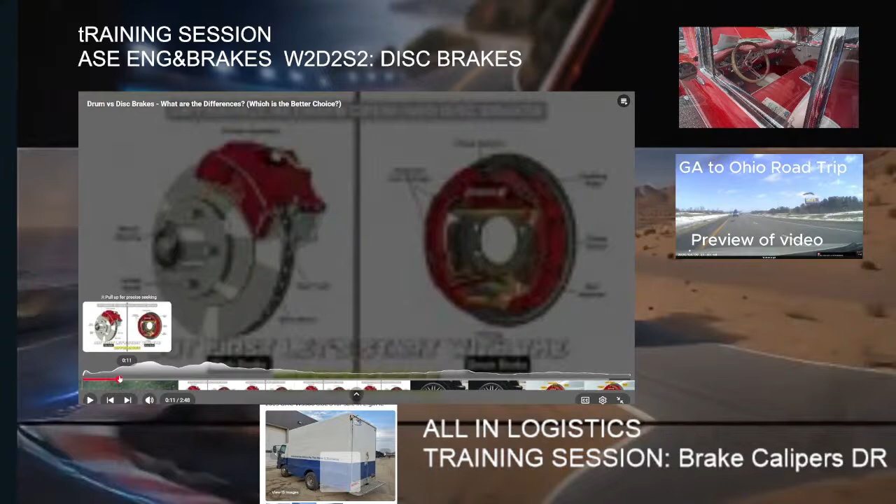Between drum and disc, in general, it's two different types of brake designs that you're going to run across. You're either going to run across disc brakes or drum brakes. The drum is like two shoes that are connected with each other, and they have a few different components like a few springs, some self-adjusters, and a few different mechanisms.

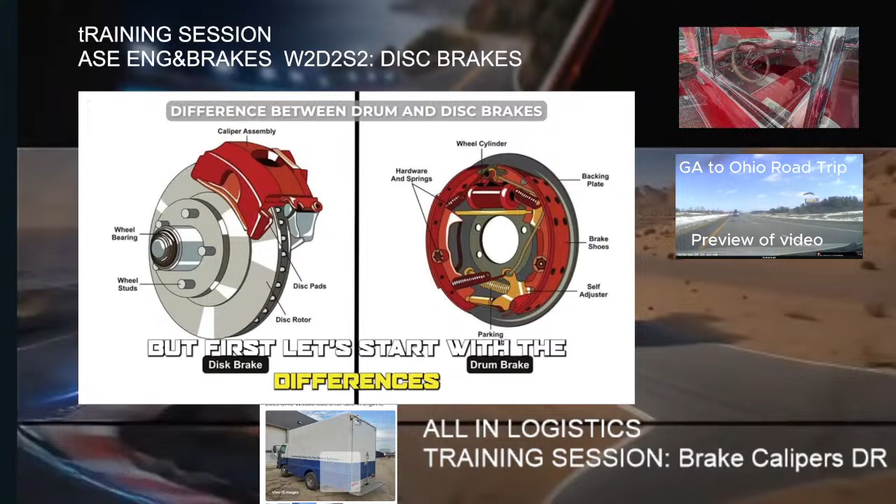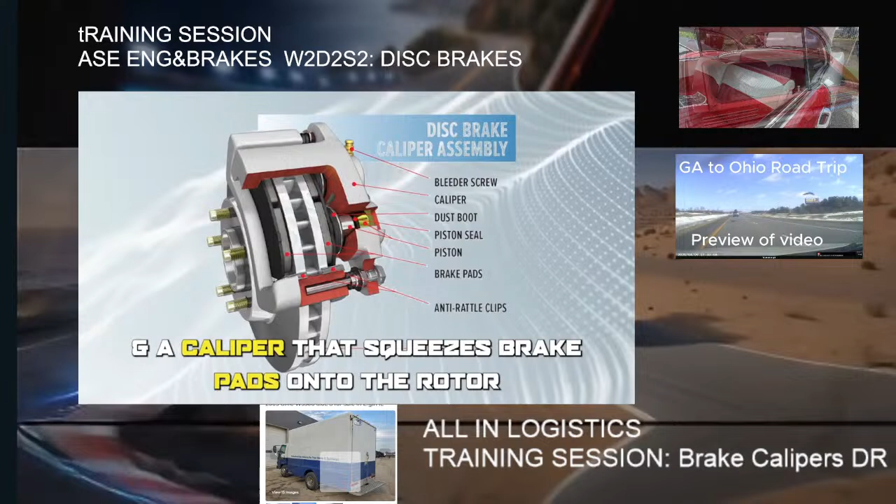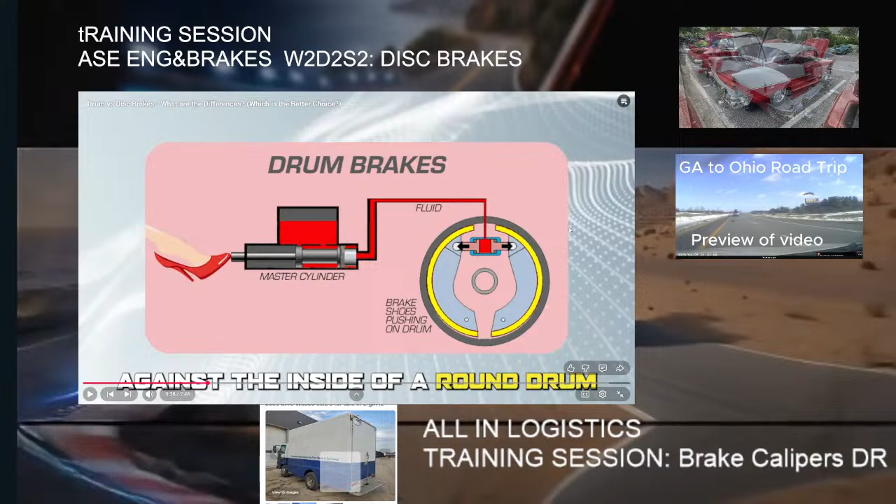A round drum attached to the wheel to slow it down. Disc brakes' effectiveness on a wet surface is smoother, cleaner than a drum brake, making it perform better.

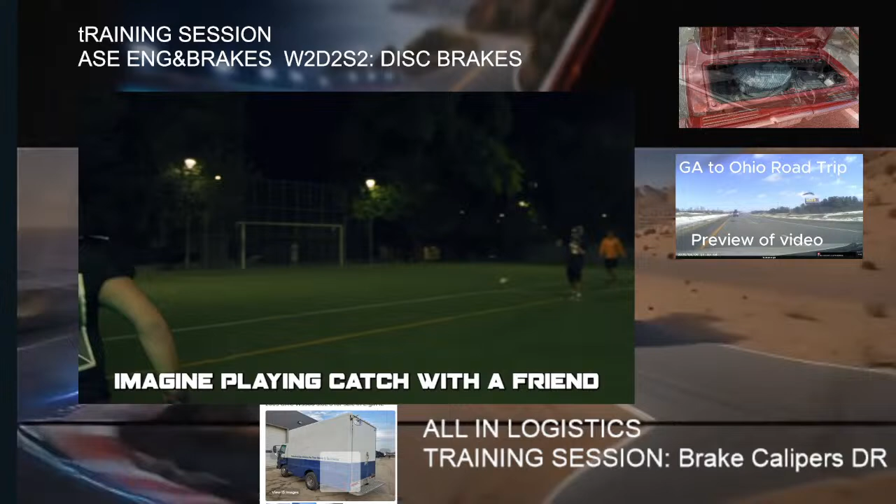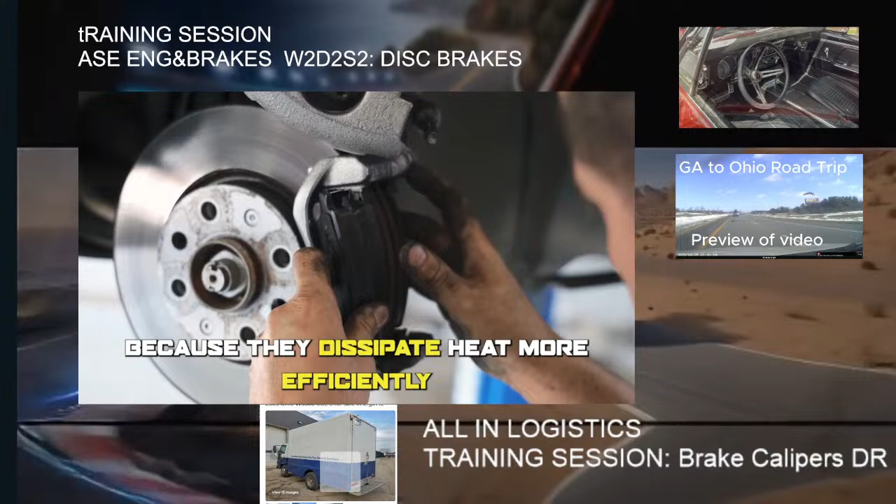Drum rotor - imagine playing catch. How brakes work is they're meant to slow down or stop a vehicle by applying friction to the brake pads or shoes to create friction. Disc brakes are often considered better because they dissipate heat more efficiently, provide better stopping power, are more precise, and are easier to maintain.

Disc brakes dissipate heat left and right, and it's the same for the full disc brake system.

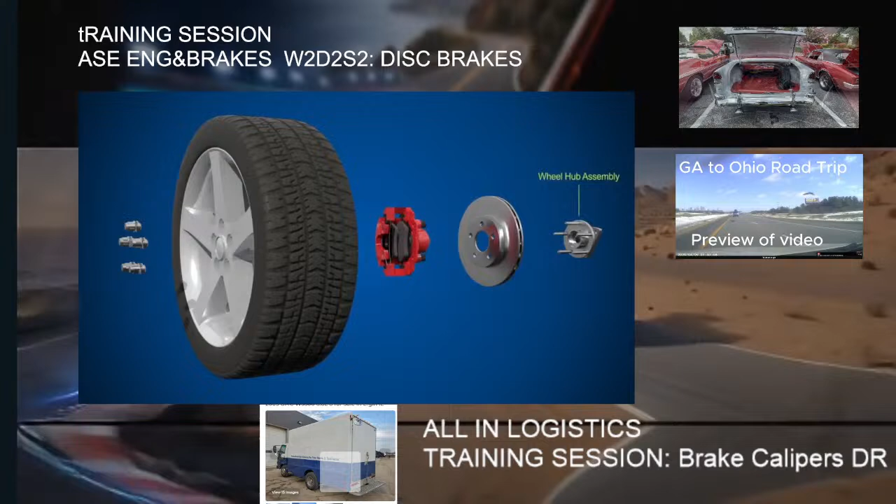We have the wheel hub assembly, the brake assembly, and the brake disc.

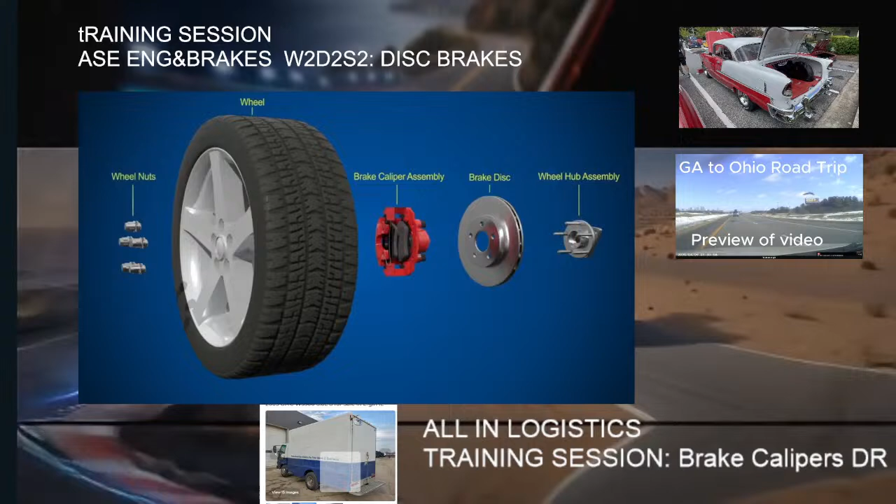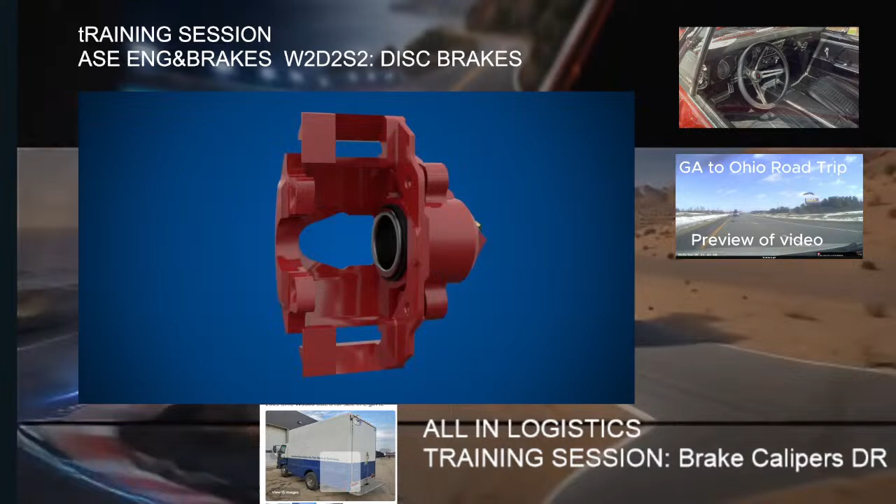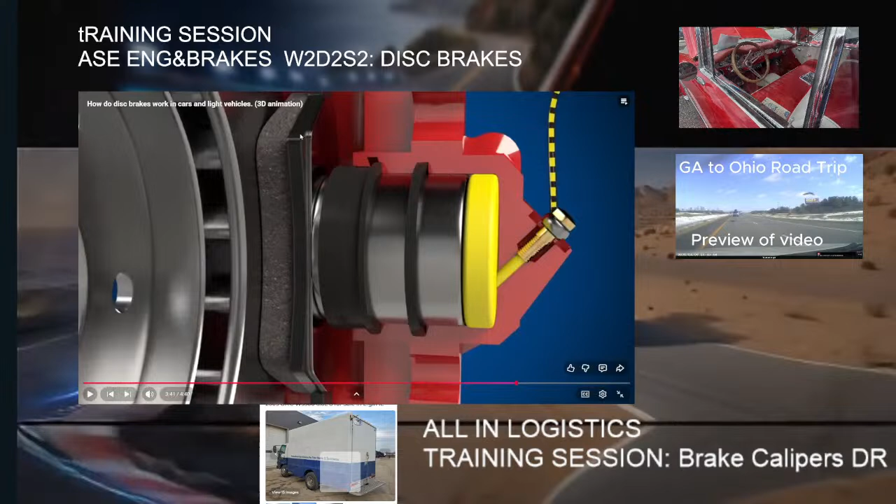An underlayer sandwiched between the backplate and friction material bonds the two together and acts as a thermal barrier to stop heat being transferred from the pad to the caliper. It happens with the base layer and then also the friction material. So it's 4 things, and generally speaking, if you understand how thick the shim, the backplate, and the underlayer is, you can figure out the brake's original position.

With pressurized hydraulic, the inner brake pad clamps onto a rotating rotor. The rotor is shaped like this, connected to the wheel hub. Brake pads are the component that rubs the rotor - they are connected to the chassis of the vehicle. So when they clamp the rotor, brake pads are able to slow the rotor's rotation.

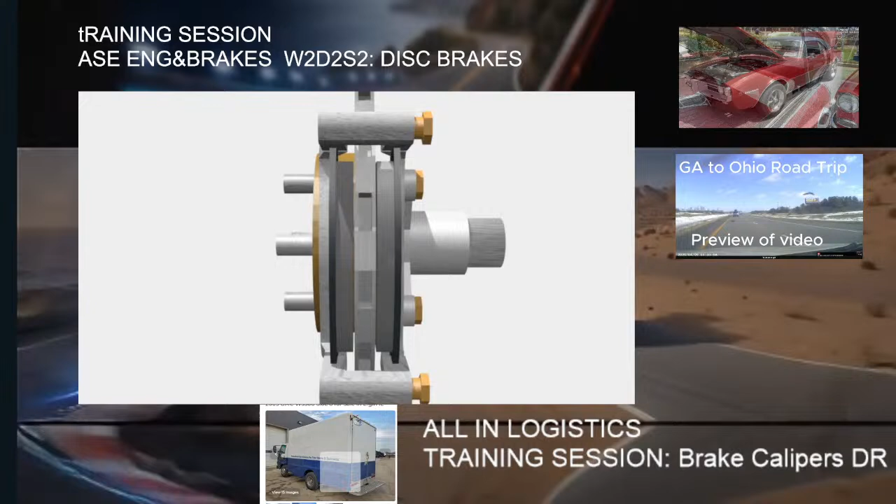But how do the brake pads clamp the rotor? We have another component: the brake caliper. The brake caliper is a brake actuator that controls the hydraulic system, which basically functions to move energy from the pedal to the actuator more effectively.

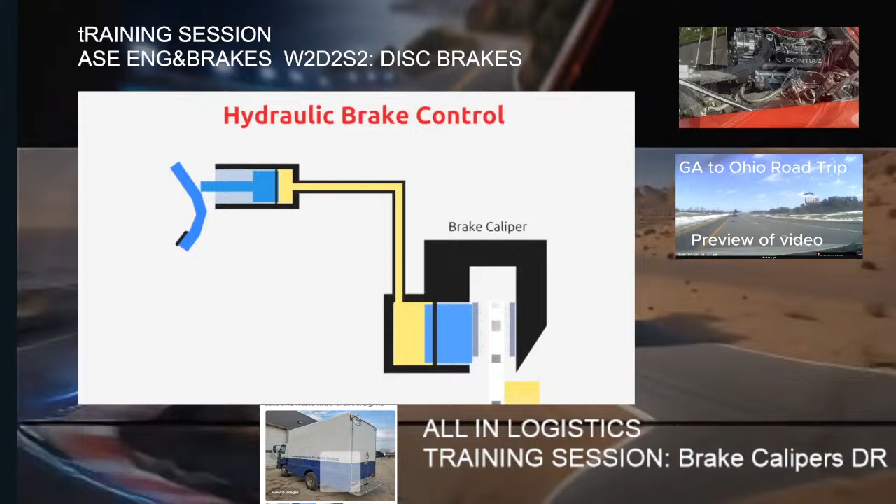So when we press the pedal, it also pushes the piston, which connects to the movement mechanism. But why is the piston only on one side? How does the caliper clamp the brake pads?

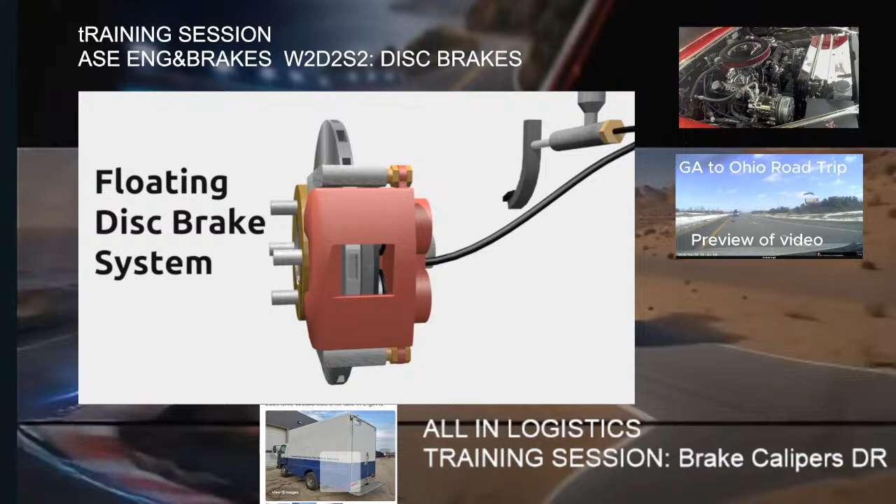The brake caliper you see is a floating type, widely applied from city cars to SUVs. In this type, there are 2 caliper pins, so the caliper can freely slide.

So the movement of the piston will slide the caliper. When the piston moves, the inner brake pad rubs the disc. Then the piston continues to move. This second movement will slide the caliper and push the outer brake pad to rub the disc.

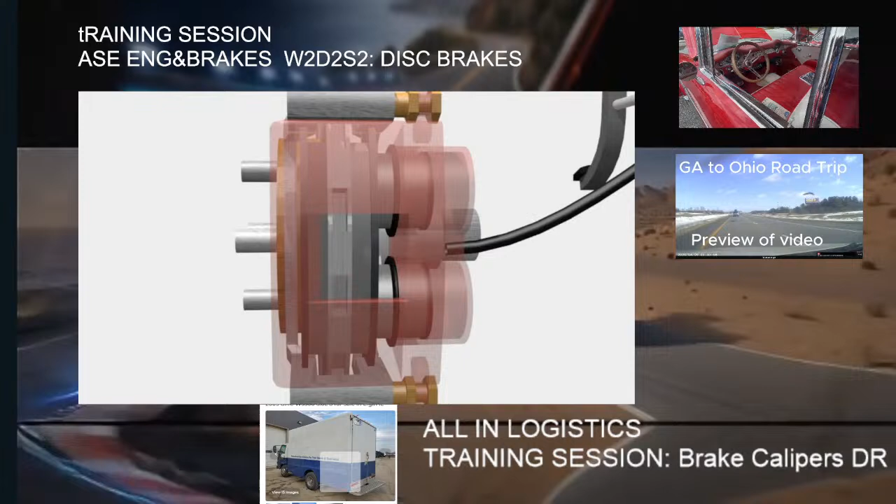Whether you like it or not, disc brakes are here to stay when it comes to road bikes, but what are they and how do they actually work?

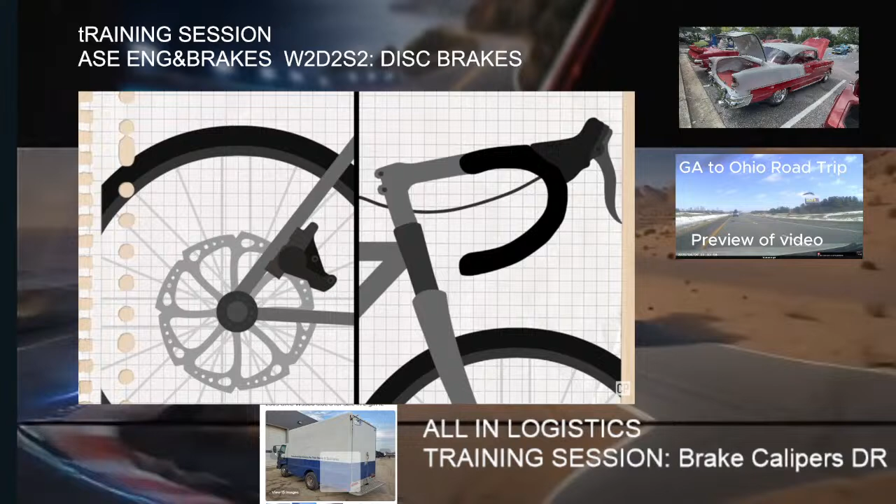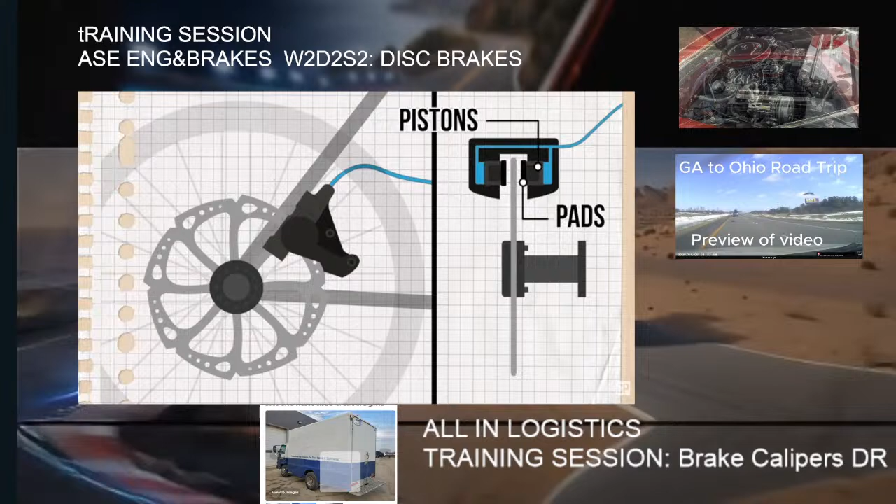A disc brake consists of a metal disc or rotor attached to the front and rear wheel hubs. Calipers are attached to the frame or fork. The calipers contain pistons which sit either side of the disc behind the brake pads. The calipers are attached to the brake levers by the brake lines. When you brake, pressure is applied to the pistons, which engages the pads around the disc.

As the pads drag against the disc, the wheel slows. Most discs or rotors are made of high quality stainless steel and range in diameter from 140mm up to 160mm for most road and gravel bikes.

The braking surface is further from the ground than rim brakes, the caliper is stiffer indeed, and the fact that a disc is much smaller than the rim on a bicycle wheel means disc brakes bite earlier, giving more braking power during the initial application of the brake.

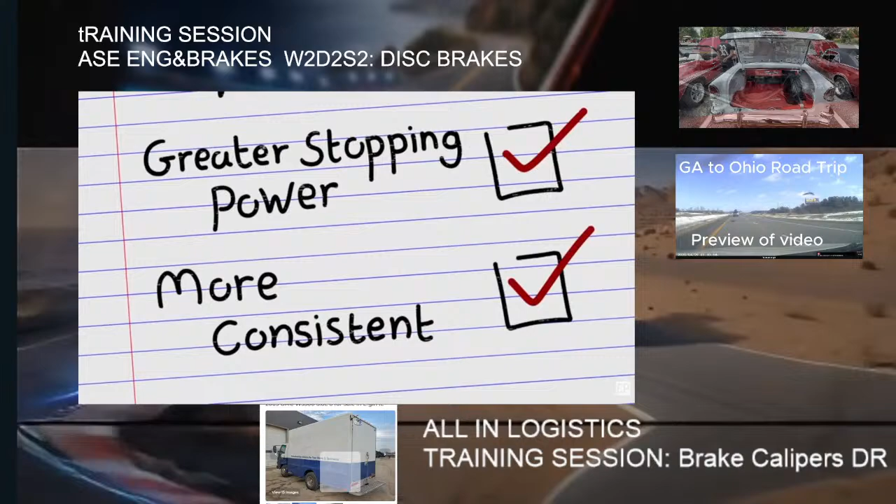Braking is also more consistent with disc brakes. This increased control, or so-called better modulation, means you can be sure of the resultant braking power you'll get from each pull of the brake lever.

There are also some downsides to disc brakes though. Disc brakes add a braking surface via a separate disc, which adds weight compared to bikes fitted with rim brakes.

Are you a rim brake purist or a disc brake convert?

Today's motorcycles and cars are equipped with a very efficient braking system. They are so efficient that your vehicle stops safely within a fraction of a second.

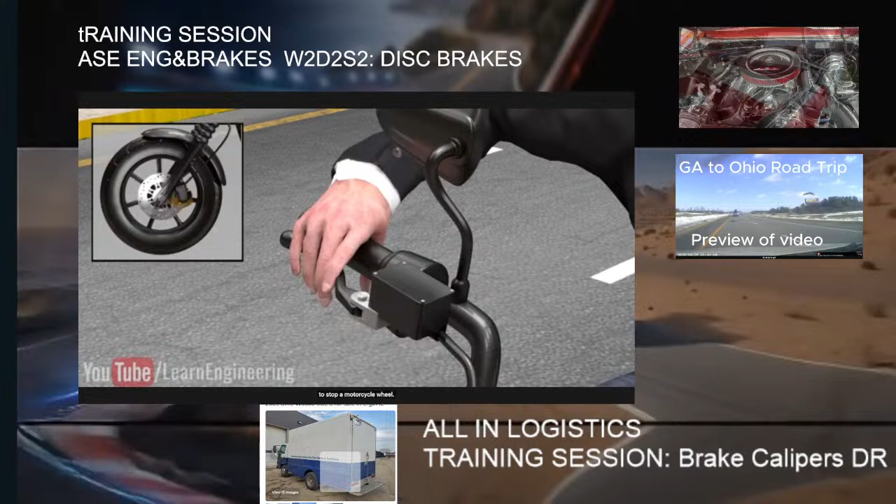Engineers achieved it by clever use of Pascal's law. When you move the lever, a small piston also moves. This piston is connected to a big piston that sits near the brake pad. According to Pascal's law, the pressure at both of the pistons should be equal.

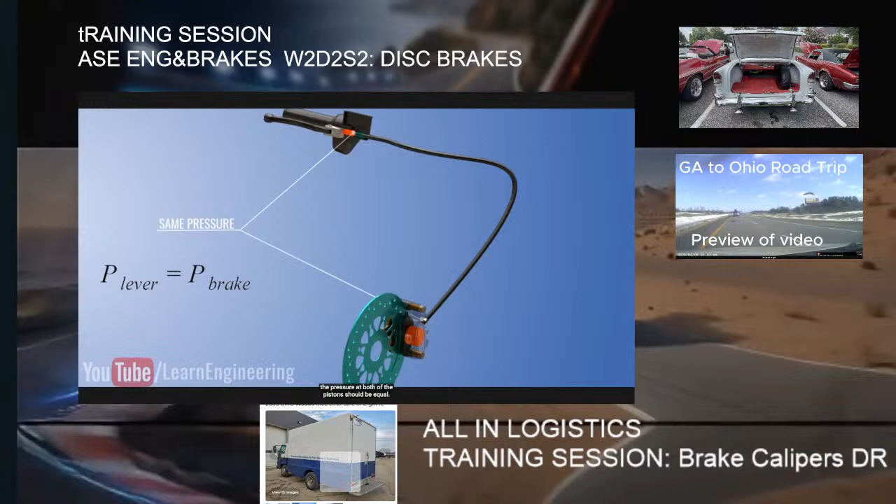This means that the force you applied to the lever end will be multiplied many times at the brake pad end, which sits against the brake disc, thus bringing the wheel to a stop. The disc is directly connected to the wheel.

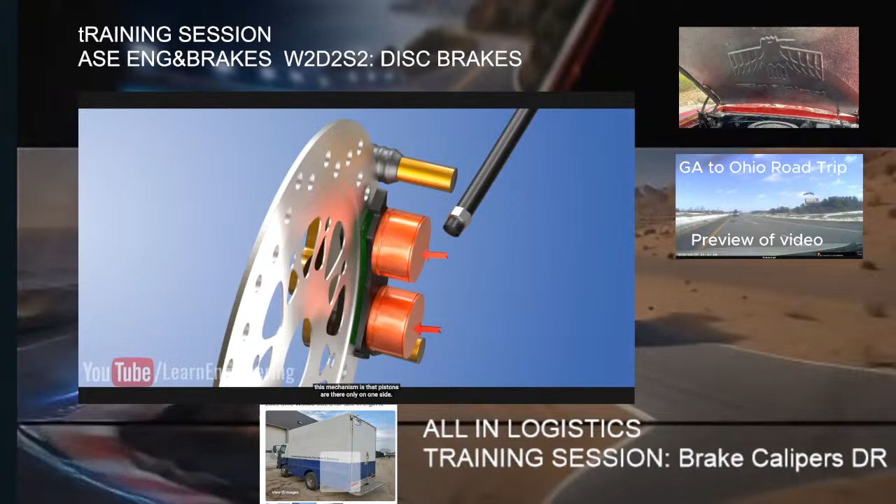To increase the area further, generally 2 pistons are used. That pistons are there only on one side is made possible due to a clever arrangement. The caliper is not fixed, rather it is free to move linearly. A caliper support is fixed to the motorcycle.